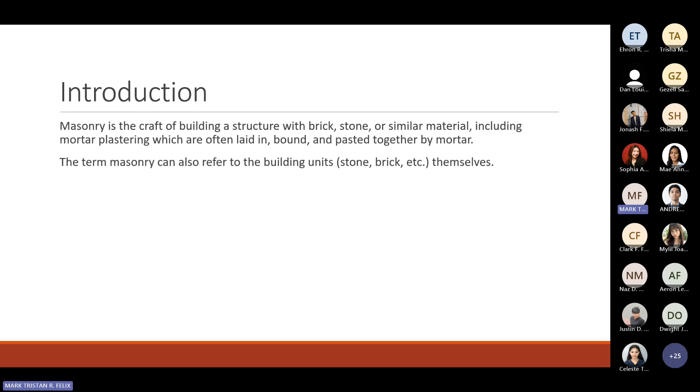The term masonry can also refer to the building units, again, stone, brick, etc. themselves. So for the learning objectives, at the end of the day, ito yung learning objectives natin. First is to differentiate mortars and plasters, enumerate and explain the different types of plasters and their uses, define and explain unit masonry, and lastly, differentiate and explain the different materials used in masonry. And also, apart from this one, is to learn how to do estimates in terms of masonry. Pero that will be on the other PowerPoint presentation. So I do have PowerPoint presentation for today.

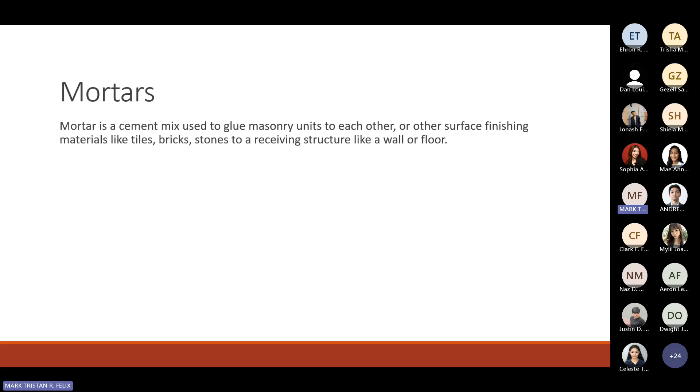So first, mortar. It is a cement mix used to glue masonry. So yan yung mga pinandidikit natin, pinang-aasintada natin na mixture. As I've said again, it's just a composition of cement, sand, tsaka tubig. Okay? I think I already emphasized that one last time. And then in terms of plaster, plaster is a mortar applied to wall surface as a preparation for a hard finish. So basically, there are cases that the material used for mortar and plaster are the same, kasi kung babalikan natin yung definition, ito yung pinangguglue, then plaster yung term kapag pinampapalitada na. Okay? So, again, magkaiba yun.

Pero in general, they are both mortar, pero technically, to differentiate the two, yung mortar, siya yung pinandidikit natin ng mga masonry. Then yung plasters, these are the coating na ina-apply natin sa surfaces. Okay, yung pinangkikinis na natin. For example, pag naglatag ka ng hollow blocks, kapag naglalagay ka ng a combination of cement, sand, and water, yun na yung nagiging plaster natin. Okay? So plaster, again, is a mortar applied to wall surfaces as a preparation for a hard finish coat.

Then, plastering is done according to two basic methods. Una, two coat, tsaka three coat. Three coat job consists of first binding coat called scratch coat. Then second, straightening coat is called brown coat. And then lastly, the final coat is called the finish coat. So we often do that kasi hindi naman natin na-accomplish ng isang plastering yung desired natin na finish. Kaya nagpapaulit-ulit tayo in terms of the coating.

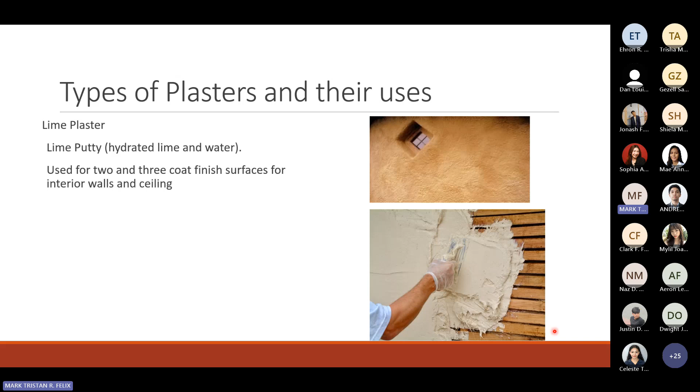And then there's also a fiber gypsum plaster. So it is a gypsum plaster pre-mixed with fibers. Ito yung naglalagay tayo ng mga fiber. I think an example of that one is this. Ayan, na parang may hibla. So fiber. So anything na dinadagdag natin para mag-increase ng binding property ng plaster.

So it can be considered as fiber, lalo na kung talagang hibla yung itsura niya. So that's what I'm saying. So sometimes they add mga organic material or sometimes mga plastic materials, etc. in terms of fiber.

And then bonding plaster, so it is a plaster mixed with ingredients developed for more adhesive strength. Ito naman mas madikit in combinations covered again by trademarks and patent. Normally, it is used for interior finish for smooth concrete walls or ceiling. Ayan.

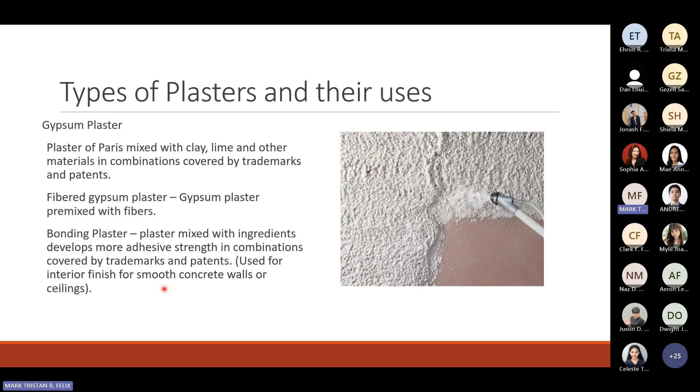Ito. So, ito yung binabanggit ko sa inyo kanina na yung material na plaster of Paris. Ayan. So, gypsum plaster, commonly plaster of Paris or molding plaster. Sometimes it is used for ornamental plaster or casting. So, yun, ginagamit din siya doon sa mga nai-injured, and then sometimes it is also used as ornamental.

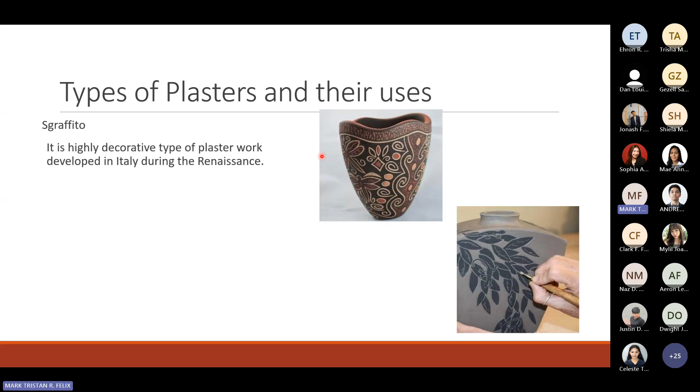Then, ayan. So for the unit masonry, let me define first yung mga location natin in terms of the masonry. So, bed, it is a horizontal surface on which the stone or bricks of wall lie in the courses. So, doon natin inilalagay yung mga masonry natin. Okay, so bed ang tawag doon. Yung horizontal surface kung saan natin siya pinapatong. Okay, whether it's a brick, whether it's a hollow blocks. So, basically, they are the same. So, bed pa din siya.

Then, course, a continuous layer of bricks, stone, or other masonry rocks. So, ang tawag naman kapag a series of bricks or stone or CHB, yung sa atin, so tawag is course. And then lastly, wythe or tier, it is a vertical section of the wall, one unit thick. One masonry unit thick. So basically, ito siya. So, ito yung course, ayan. Yung continuous layer of bricks. Ang bed natin yung pinaglalatagan niya na horizontal surface, whether nasa ilalim or yung mga succeeding layers.

And then we have the header, this one. Ayan, rowlock, yung pagkakadikit niya ganito. And then soldier, it is standing upright. So there is a bull header and then a bull stretcher kapag ganito yung pagkaka-layout. And then a stretcher naman kapag nakapa-horizontal, facing sa atin yung longest side. If you would compare the header, soldier, and stretcher, so you would be able to differentiate the three.

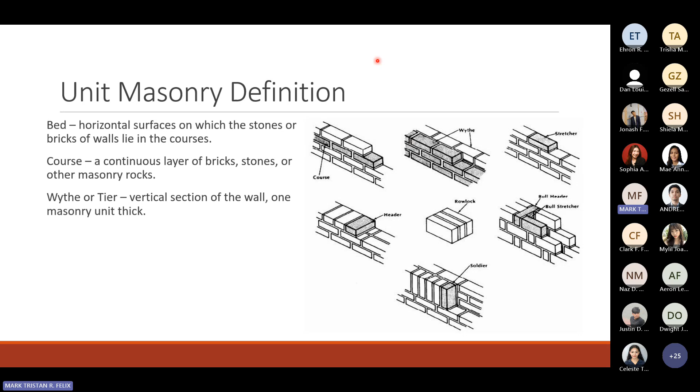So that's the differentiation of the three. The images here are self-explanatory in terms of the descriptions. Then there's the bond, the connection between bricks or stone, formed by lapping them one upon another, carrying the work so far as to form an inseparable mass of building. So the bond is what we call the mortar that fills in our masonry so they stick together.

Then stretcher, which we already discussed, laid down lengthwise of the wall. And then header, brick or block mason extending over the thickness of the wall. I think we've explained all of this already.

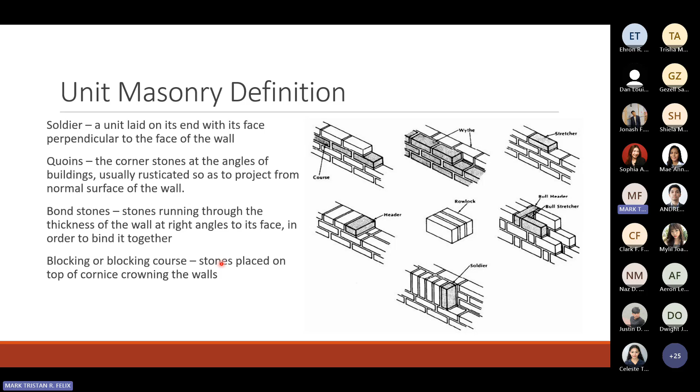So what's next here? Quoins, the cornerstone at the angle of a building, usually rusticated so as to project from the normal surface of the wall. And then we have bond stones, then blocking course.

The next are other types of stones that can be used as finishes in terms of construction. These are commonly used stones or materials for architectural finish. They might come from a natural form like this.

Just imagine a much larger version of this, almost like a whole mountain being mined. As they process it to refine it, it can later be used for construction purposes architecturally. Apart from the masonry we install, we normally add finishes - sometimes paint, sometimes tile, or sometimes these kinds of natural stones as part of the finishes.

Some of these are granite, marble, travertine, limestone, sandstone, and slate. I think you're familiar with these, or you've probably seen one.

If it's not familiar, I can share one. If you're familiar with the Enterprise Building in Makati, let me show you. I'm not sure exactly what finishes they use, but it looks like they used this kind of finish. Let me search on Google.

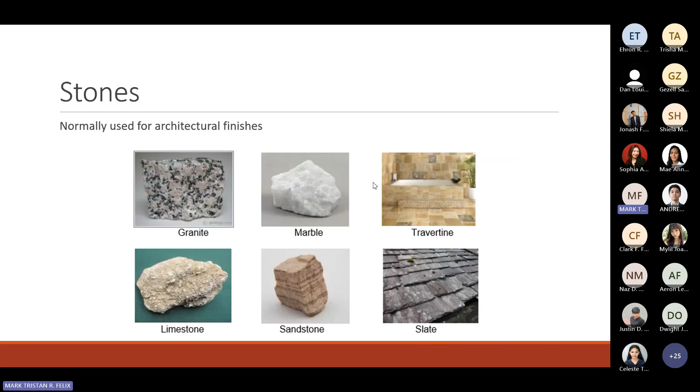Anyway, going back. So stones are commonly classified, first, as rubble stone. It is a masonry of rough undressed stone - undressed meaning it hasn't been smoothed yet. Rubble is like cut into portions and then laid directly onto the structure.

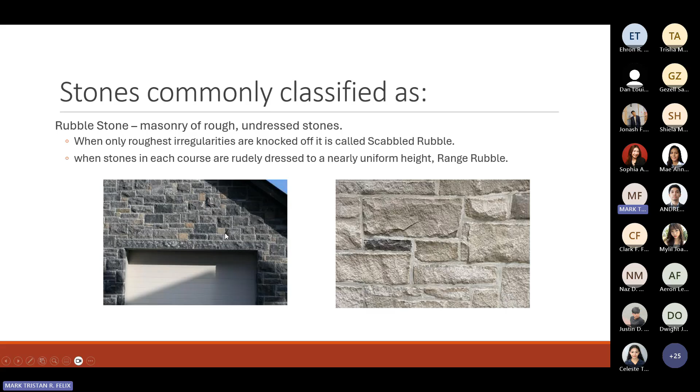And then there's another one, random work. This is commonly seen in finishes with that desired look. The stone here is randomly laid. There are cases where they're smoothed a bit, but normally it's random laid - it has no pattern except for being random.

So this is randomly laid angular stone, and this one looks like rectangular and square shaped stones laid like this.

Then there's another one, ashlar. It is squared stone in regular courses - these are of equal sizes. This is in contradistinction to rubble work. If you compare the two, this one has equal dimensions or size of stones.

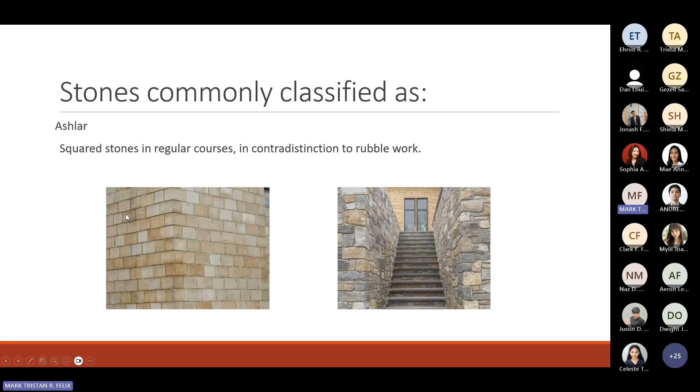And then next is rustication. It is an architectural feature that contrasts in texture with smoothly finished surfaces. An example of that is this.

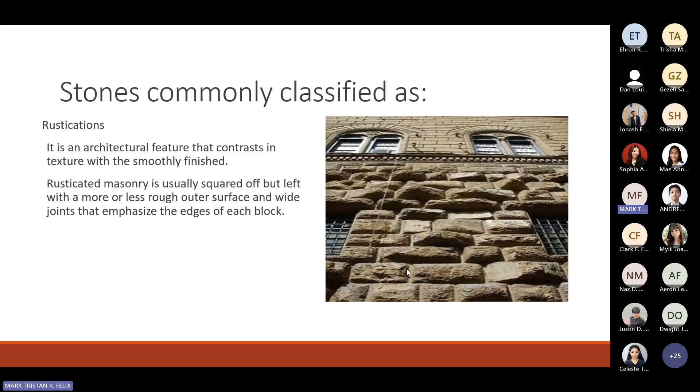I think we can also consider as part of this the material used - I'm not sure if you're familiar with Adobe. It's a large block of stone, used back in the old days. Let's find it - Adobe Rock.

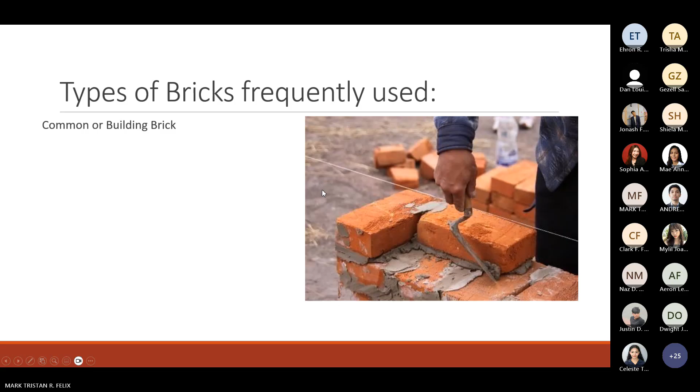There's also another one, the facing brick. It is used for exposed masonry surfaces, especially processed to give certain specific surface characteristics. Ito naman, kumbaga yung harap lang yung brick, pero hindi talaga siya brick, parang pinapifinish lang natin. Based dito sa image, mayroon pinaglalagay ng parang maninipis na bricks, and then nilalagay ng plaster or mortar na magmukha siyang brick finish, o gawa talaga sa brick yung structure.

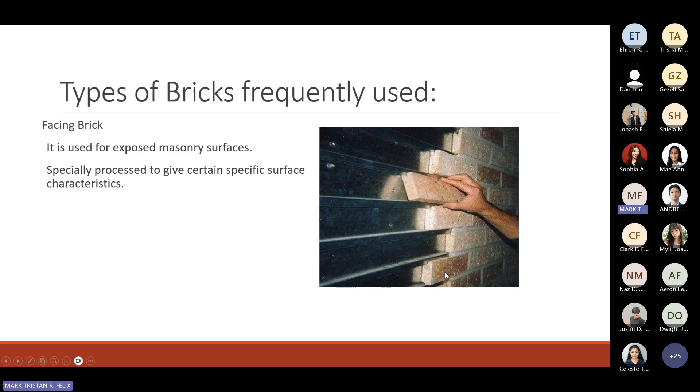On the other hand, we also have the glazed brick. Ito naman yung medyo glossy or makinang, ayan siya, it has a smooth outer surface with a dull satin or high gloss finish. Based sa image, ayan siya yung difference niya with the other two, nagiging finish na siya unlike with the other one, kailangan mo pang i-plaster o lagyan ng finishes talaga na desired kasi raw, if you compare that with this one.

Then they are also load-bearing, fire-resisting, and impervious, meaning impervious, hindi nakakapasok ng tubig. Then they usually form vertical hollow cores through the body with scoring on the back.

Then there's another one, lastly is the fire brick. Ito naman yung mga fire rated, di ba nasabi ko kanina yung ginagamit sa mga pugon, sa mga oven, so ito na yung mga fire rated. These are ordinarily made from a mixture of flint clay or plastic clay and are used for the lining of furnaces, fireplace, and chimney.

And then I think, if I'm not mistaken, there are multiple types pa ng fire rated bricks, kasi hindi siya standard lang sa isa, kasi yung ibang mga bricks mas mataas yung fire rating niya compared with the other one, like yung ginagamit sa oven na mga pugon. If you compare that sa bricks na ginagamit sa furnace o sa kiln na mas mainit yung temperature na umaabot ng 1,000 degrees, iba yung material na ginagamit doon in terms of the building or the creation of the brick itself.

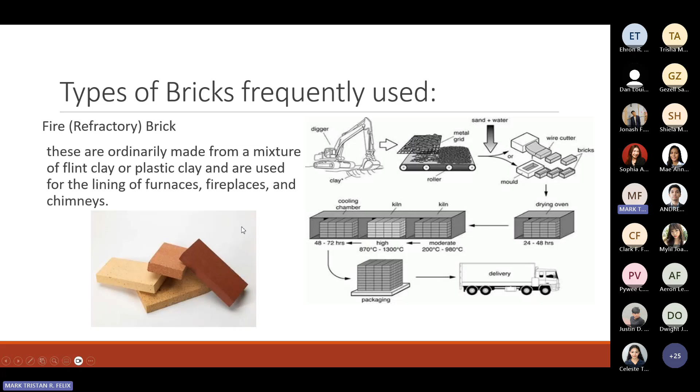I hope the different types of bricks are clear. Now let's go to brickwork, or how bricks are laid. Let's just mention these: common bond, English bond, Flemish bond, and herringbone bond. Instead of reading this, let me show the image.

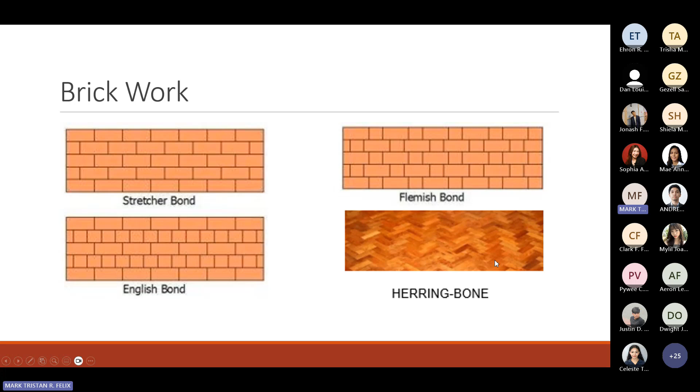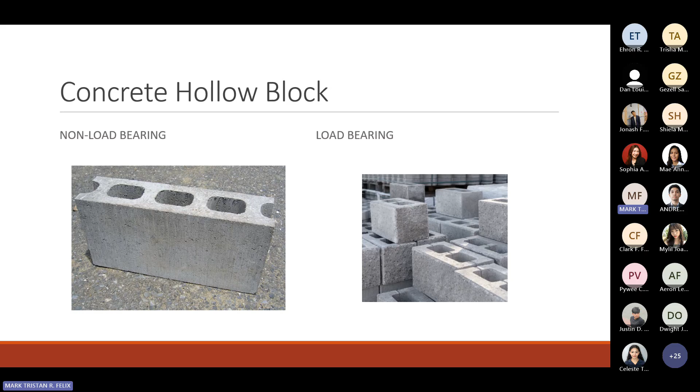Okay? And then for the market size of non-load bearing, so ito yung sizes as I've said a while ago. It's 4, 6, and 8. Ayan. So I think may 5 to. Pero ito yung commonly 4 and 6.

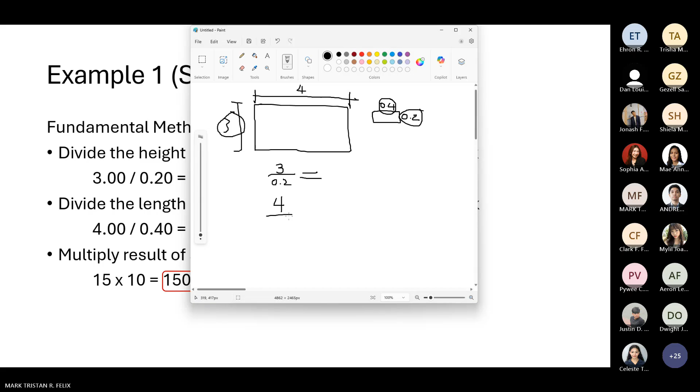Sir, naka-mute po kayo. Plus nag-mute. Saan nawala yung audio ko? Sorry. Na-discuss ko ba to? Na-explain ko ba to? Hello? Na-explain ko ba to? Example 1 na. Sorry. Drawing na po kayo. Okay, sige. Thank you. Pasensya na. Anyway, going back.

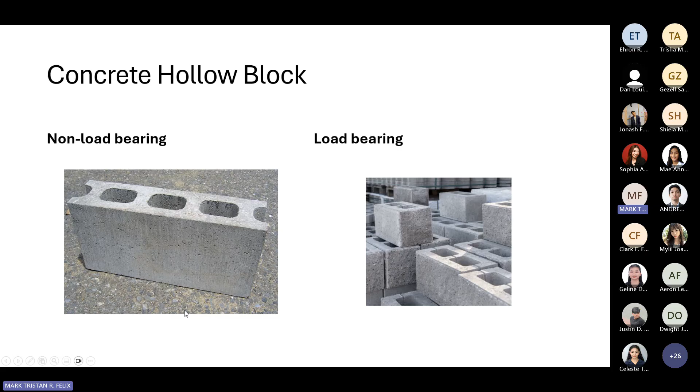Then add the volume of the filler and core. Yung filler, okay, i-add mo doon sa core and then i-multiply mo siya sa number of CHB.

Kumbaga basically, you need to get ilang mortar ba yung gagamitin natin per piece ng CHB. Tsaka mo siya i-multiply doon sa nakukuha natin kanina total number of pieces. Okay. Then add the volume of the filler and core and then multiply to the number of CHB.

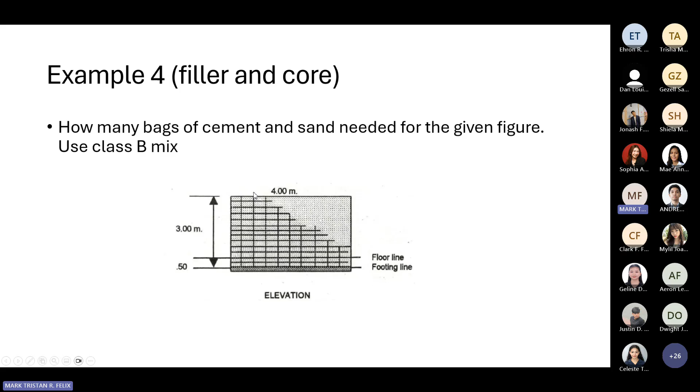Now, kapag ka by area naman, okay, so kapag ka by area, kunin mo yung volume, sabi dito, get the total area, okay, area lang, hindi mo i-multiply sa thickness.

Sa pagka by area naman, may chance kang mamili ano yung thickness nung plaster mo. Okay, pwedeng manipis hanggang kakapal. Kung ganito, meron kang desired thickness, ito yung sundin mo. Kung wala kang desired thickness, yung average lang na 16 mm yung gamitin mo kasi siya yung nasa gitna.

So let's have an example para kung paano to gamitin. Tsaka etong isa. Okay, so same problem. Okay? Plastering both sides. Pero take note, dito ba pinlaster yung buo? Pinlaster na yung buo. Pero if sa example natin na to, pinlaster natin pati yung nakalubog.

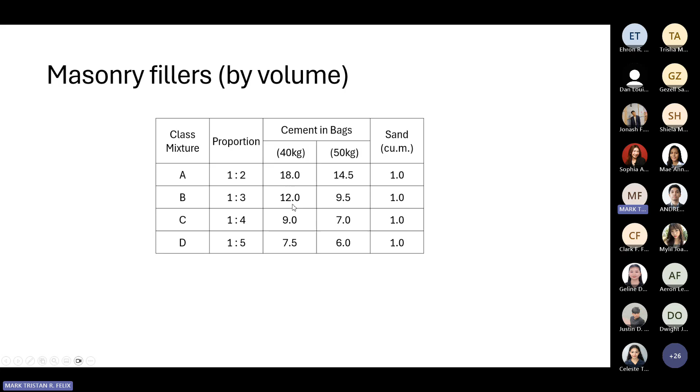Then once you know this one, di ba sabi ko sa inyo, i-check nyo lang yung table na nasa kabila kanina na by volume. Okay? Since we are also using the same mixture class B, so you multiply that by 12 and 1. So balikan lang natin. Class B, ayan. 12 and 1. Okay? Ayan siya. So yung volume, multiply nyo lang sa 12 sa cement, 1 sa sand. So that's 4.6 or 5 bags.

Then this one naman is 0.384 cubic meters. Class, kapag ganito yung problem, kahit sa actual, kapag kino-compute nyo yung total sand and cement para sa masonry, bago kayo mag-round up, well, dito sa example ko kasi nag-round up ako kasi every topic to eh. Pero sa plate, sa actual, sa exam, bago kayo mag-round up, i-add nyo muna itong number of cement dun sa total number of cement sa filler tsaka sa core.

Kasi parehas ka lang din naman ang o-orderin ng bags of cement, hindi naman siya magkaiba. Tsaka pagka hinalo mo yan, isahang halo din naman yan. Tipong pagkalagay mo ng CHB, 'di ba? Pwedeng idediretso mo na yung plaster. So kapag may paupo tsaka yung palaman, plaster din pagkatapos. So isahan lang din 'yon. So pwedeng wag muna kayo mag-round up kayo pag napag-add nyo na yung dalawang cement volume or sand volume. Kasi dadami yung wastage nyo pa nagkataon.

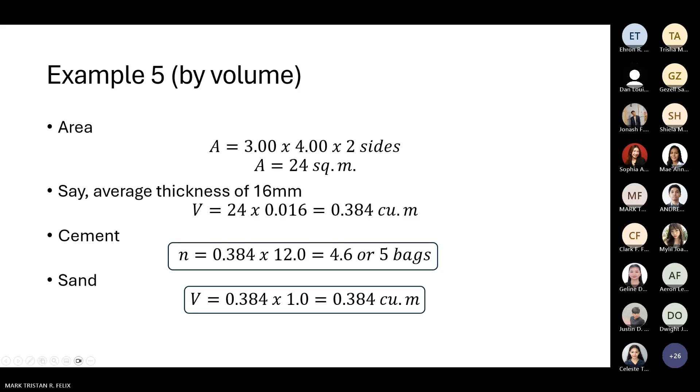Ganon din sa sand. Okay? Ayan. Bago kayo umorder, so i-total nyo na lang din muna. Okay? So ito yung by volume. Sa by area naman, ito, yun nga yung sabi ko, kunin nyo lang yung area, tapos i-multiply nyo lang doon sa table. So that's 24 times cement na 192, tapos sand na 0.16.

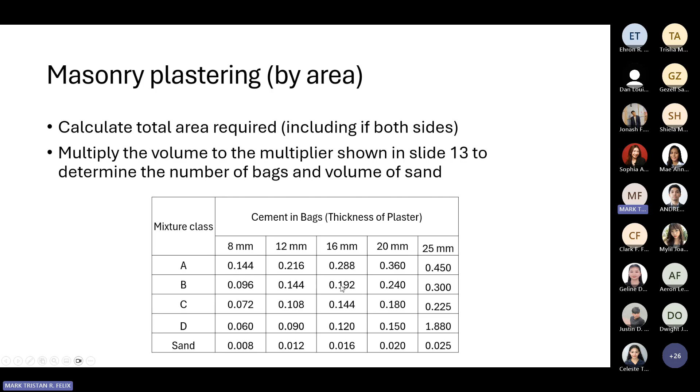So saan nanggaling yan? Dito. Class B, 192. 16 mm. Class B, 192. Yung sand, 0.016. Sabi na yun. Tanggalin natin to. Baka nasama lang to. Ayan. So area lang, tapos multiply mo lang dito sa table na yan.

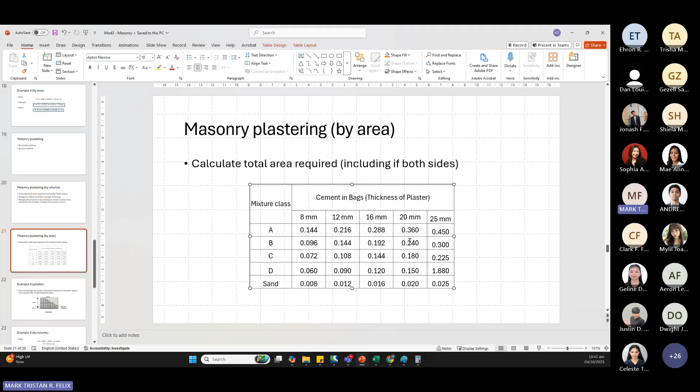Okay? So again, class B, 16 mm. Ito yon, 192, tapos 16. Ito, sand. So yung multiply yung dalawang values na yan sa area. Ay, ito rebar niya. Area. Ito siya. So ang sagot, 4.6 or 5 bags, and then the other one, 0.384 cubic meters. Straightforward naman yan. Hindi naman yan mahirap na formula.

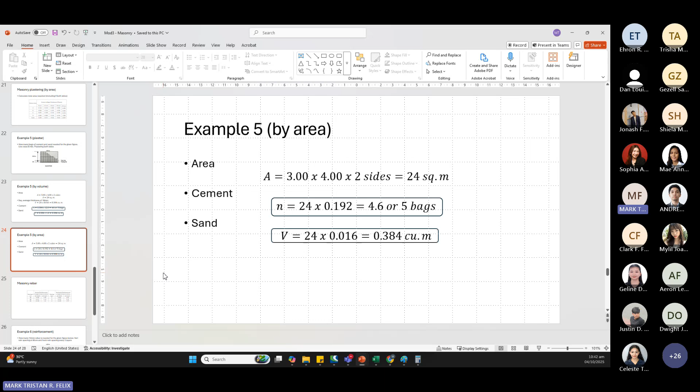Okay? So yan yung mga, yan yung estimate na cement sand. Lastly, isama na natin yung rebar. Although we will be having separate discussion for the rebar. Okay? Discuss ko pa ba ito sa ibang araw na? Hindi, sige ngayon na. Para isahan na lang.

Okay, for the rebar naman, naglalagay tayo ng bakal sa masonry. Kasi pag walang bakal yan, isang sipa lang yan. Tututumba na kagad yan. So kailangan natin na mag-withstand nung flexure or bending laterally ng ating wall. Okay? So for the rebar, okay?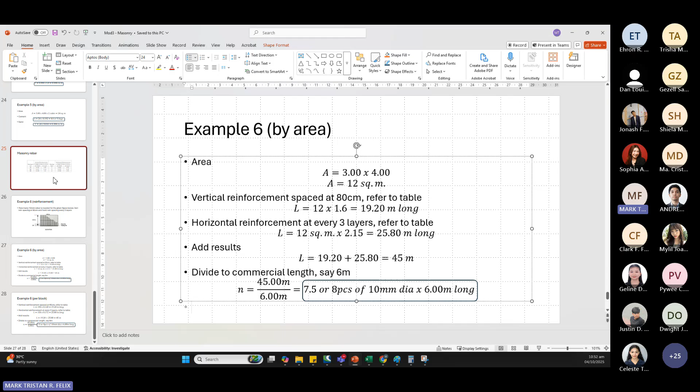Kapag ka per block naman, kung ilan yung block na kailangan mo, 'di ba? Ang na-compute natin kanina is 150 na block, 'di ba? Now, you just multiply that doon sa ating table. If you're gonna use spacing na 80, so ito yung multiplier mo kapag ka block. 150 times 0.128. And then kapag ang spacing mo horizontally is 3, you just multiply that sa 0.172.

150 times 0.172. So the answer for both is 19.2 and then the other one is 25.8. Again, i-add mo lang yan, 45. So same process then, you divide that by the commercial length na gagamitin mo, say 6 meters. And then ang total natin is 7.5 or 8 pieces. So the final answer is 8 pieces of 10 mm diameter na ang haba is 6 meters long.